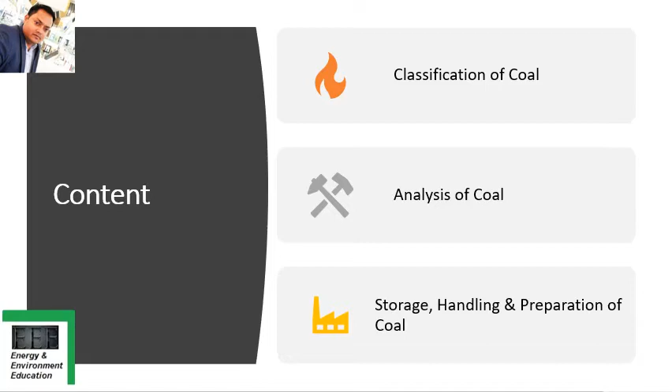So first comes the coal classification. You can see here the coal is classified into three major types. These three names you must remember because they may ask you in short type questions, or maybe objective type questions also: anthracite, bituminous, and lignite are the three major types on which coal is classified. However, there is no clear demarcation between them. And coal is further classified as semi-anthracite, semi-bituminous, and subbituminous.

Anthracite is the oldest coal from the geological perspective. So they may also ask you to state which is the oldest coal. In that case, anthracite will be the correct answer. It is a hard coal. So if they ask you about anthracite, briefly you can explain that it is the oldest coal, and you can also explain the composition given here.

Lignite is the youngest coal from the geological perspective. So as far as the oldest is concerned, anthracite is the oldest one, and the youngest one is lignite. These two names you must remember in this way also. And it's a soft coal; that one was a hard coal. They can ask you the difference briefly, to explain it, and also as a one-word answer type question, friends.

Fixed carbon refers to carbon in free state, not combined with other elements. So they may ask you what you mean by fixed carbon. This type of question has come earlier and can come in the exam also. Volatile matter refers to those combustible constituents of coal that vaporize when coal is heated. So they may ask you to define volatile matter also. These types of questions can come from different parts of the paragraph you are seeing in the slide. So this is very important as far as the exam is concerned, friends.

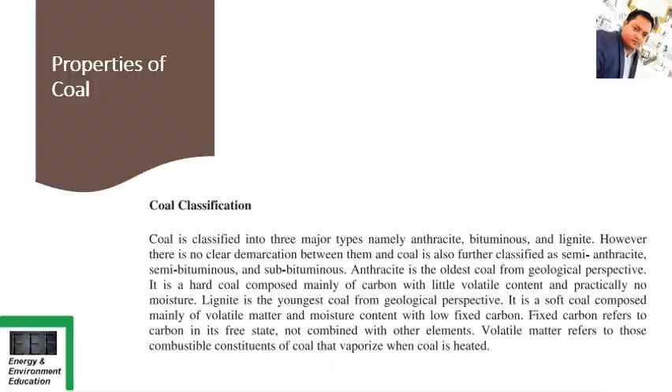As far as the gradation of coal is concerned, there are different grades given, grade A, B, C, D, E, F, G, and you can see the calorific value accordingly. For example, grade A is exceeding 6,200 kilocalorie per kg calorific value, and as you go down, the calorific value decreases.

So A is a better coal, and likewise G is the poorest type of coal you can consider. So you can grade the coal accordingly on the basis of calorific value. They can ask you to classify the coal, and also they may ask you to explain the gradation of coal.

So when they ask you to classify the coal as a whole, you can give that paragraph that I mentioned in the last slide, friends. And when you are asked to grade the coal, you can list out the different types of coals, grading, and the calorific value accordingly, friends. GCV for various coals is also given here.

For lignite, the GCV value is 4,500, Indian coal is 4,000, Indonesian coal is 5,500, South African coal; country-wise you can see the different types of coals here, and they have their own calorific value. So this is also very important.

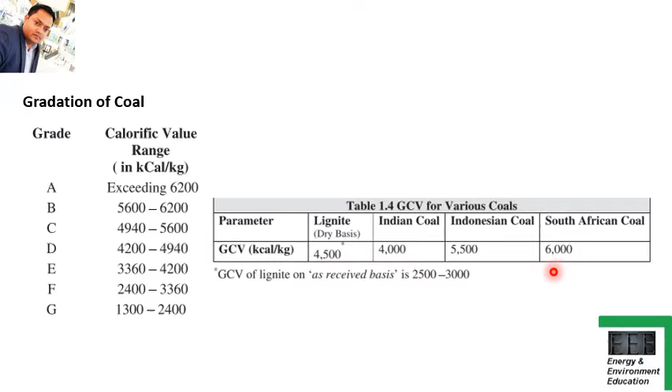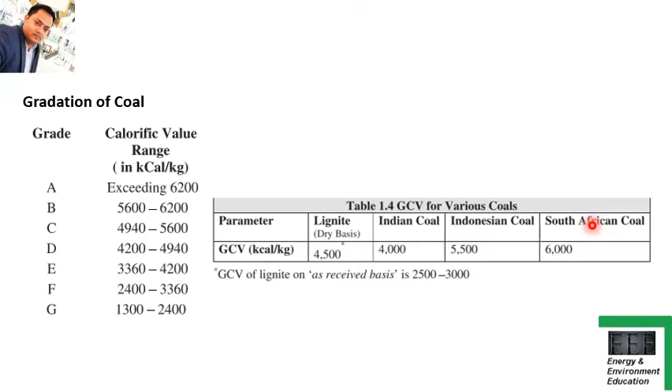And for the exam they can ask you which is the best type of coal, and also on GCV value they may ask you questions, and which country has the best type of coal as far as the GCV value is concerned. They may ask you the same question in different ways, friends. So this is very important for you to understand.

And this is also an important part of the chapter where they may ask you to give the analysis of coal. So basically there are two methods, the ultimate analysis and the proximate analysis. They may ask you to explain the two methods, or to differentiate between the two methods. So you must understand these two methods and also their differences.

Ultimate analysis determines all coal components, elements, solid or gaseous, and the proximate analysis determines only the fixed carbon, volatile matter, moisture, and ash as percentages. So this is the basic difference between the ultimate analysis and the proximate analysis, which you should remember and understand also.

Ultimate analysis is determined in a properly equipped laboratory by a skilled chemist, while proximate analysis can be determined with a simple apparatus. This is the second difference. So both the differences you must remember, friends, and understand also. It may be noted that proximate has no connection with the word approximate. This is another term that you must understand and remember, friends.

So here two differences are given between the two methods, the ultimate analysis and the proximate analysis. They may ask you in the exam to differentiate between the two methods. So in that case, you can explain in this way, friends.

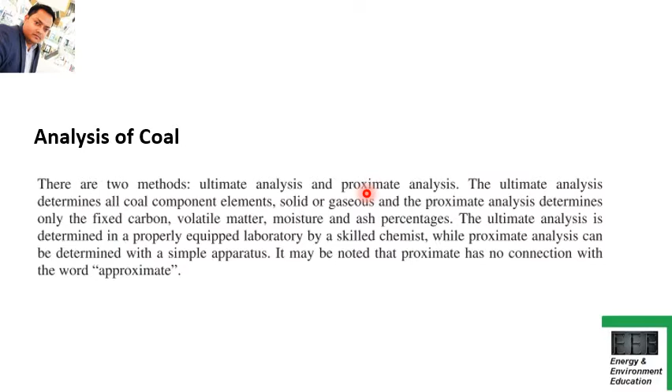Now coming to the proximate analysis, friends, this is very important to understand. Proximate analysis indicates the percentage by weight of the fixed carbon, volatiles, ash, and moisture. These are the four components when you go for the proximate analysis: the moisture, ash, volatile matter, and the fixed carbon.

Now see here, the amount of fixed carbon and volatile combustible matter directly contribute to the heating value of the coal. So when you determine the heating value of a coal, two components are very important: the fixed carbon and the volatile matter. Fixed carbon acts as the main heat generator. So the more fixed carbon you have, the more heat will be generated, and the better it is.

And high volatile matter content indicates easy ignition of fuel. So if it is highly volatile, it will be burned easily. These are two major components you must understand when you categorize the coal. Then the ash content is important in the design of the furnace. The more ash there is in the coal, it's not viable enough. So you need to understand how much ash content is there in the coal.

So ash content is also equally important to design the furnace grate, combustion volume, and pollution control equipment. The more the ash, the more pollution there will be. So the ash handling system also needs to be upgraded. That's why I'm saying fixed carbon and volatile combustible matter are important for the burning of the coal, but for the handling of the coal, pollution and other aspects, you have to understand that ash is also important.

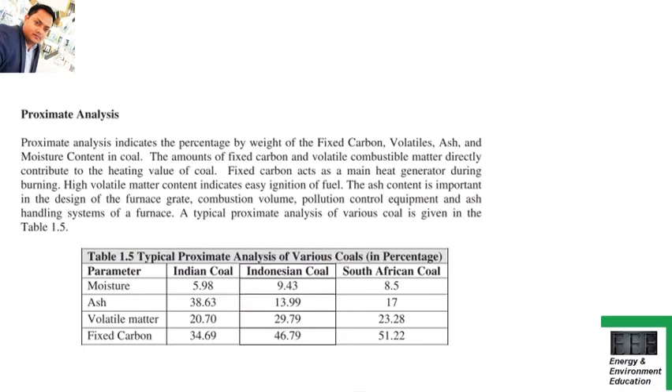Now, the ultimate analysis indicates the various elemental chemical constituents. So, unlike the proximate analysis, here the other chemical constituents are also considered, like carbon, hydrogen, oxygen, sulfur, etc. These things are considered when you go for the detailed analysis, that is the ultimate analysis. So in this case the different components are listed out here: moisture, mineral matter, carbon, hydrogen, nitrogen, sulfur, oxygen. Accordingly, you can see the Indian coal and the Indonesian coal comparison is given as a percentage.

So this is also important for you to understand, when they ask you to differentiate between the two. These can be useful terms that can be highlighted during the exam, friends, when you write the differences. And also they may ask you to give examples of the different components in the case of ultimate analysis, and the components which we have in the case of proximate analysis. That also should be remembered, friends. So this is very important.

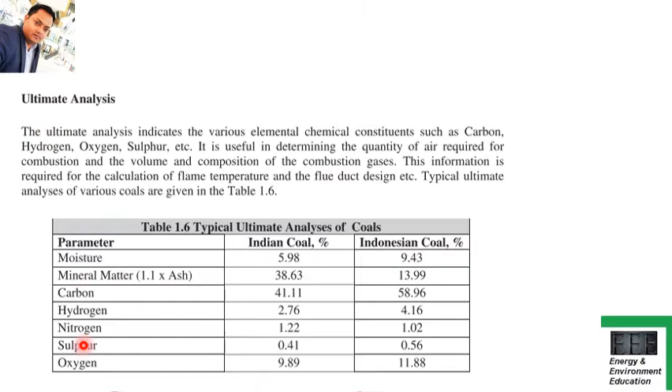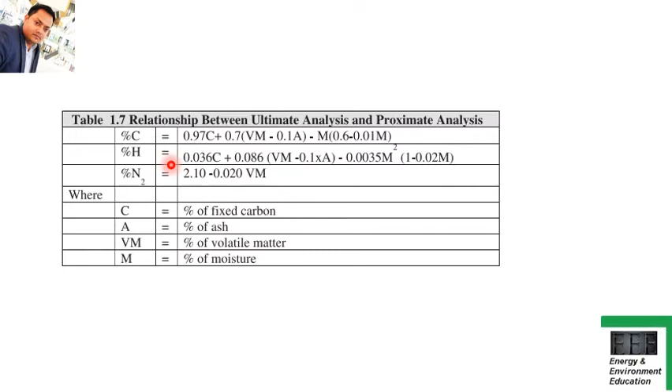Now, handling of coal is very important. That is, storage and preparation of coal is very important. The main goal of good coal storage is to minimize the carpet loss and also the loss due to spontaneous combustion. So this thing is very important about how you store the coal, because there should not be any carpet loss ongoing, and also there should not be any combustion, because if it gets ignited, this will be really hazardous for everybody in the plant. So that's why the handling of the coal or the storage of coal is very much important.

Formation of soft carpet comprising coal dust and soil causes carpet loss. So these things have to be remembered. I'm not going to explain in detail here. So basically what I'm trying to explain to you here is that the storage of coal is very much important, and the methodology that is adopted to store the coal has to be understood by you, and also remembered by you, and why it is hazardous and how it can be better managed. These things have to be understood by you, friends.

The measures that would help in reducing the carpet loss. Now these are the 2 points where they highlighted the different measures you can take to reduce the carpet losses. So preparation of the hard ground for coal to be stacked upon. So it's not to be soft ground. Also preparation of a standard storage bays out of concrete and brick. These two things are very much important when you are going for the storage of coal. So when they ask you to write some notes or briefly explain the storage of coal, you can highlight these 2 points, and briefly explain them, and the methodology to store the coal, friends.

Now coming to the preparation of coal. Preparation of coal prior to feeding into the boiler is an important step for achieving good combustion. Large and irregular lumps of coal may cause the following problems. So basically you need to understand that how you prepare the coal is very much essential before you feed it inside the boiler, friends. Poor combustion conditions and inadequate furnace temperature result from irregular lumps of coal. Higher excess air resulting in higher stack loss, increase of unburned in the ash, and low thermal efficiency. So you need to understand how to prepare the coal in a better way, such that these things are not problematic for you.

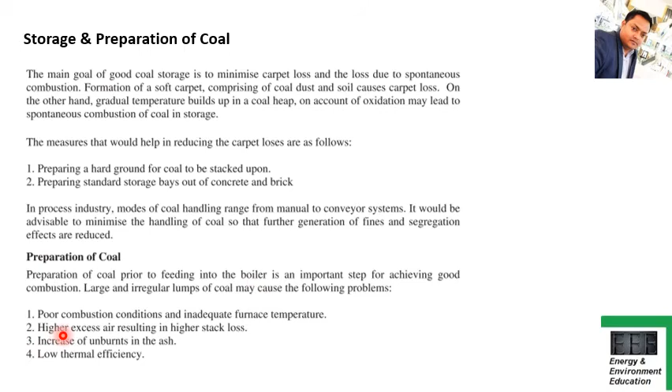So as per the last slide, we saw the preparation of coal is very important. Large and irregular lumps of coal can cause a lot of problems. Therefore, proper sizing of coal is very much important. Proper coal sizing is one of the key measures to ensure efficient combustion. Proper coal sizing with specific relevance to the type of firing system helps toward even burning. So if the coal size is proper and even, then there will be even burning, reduced ash losses and better combustion efficiency.

But if you have irregular size and larger lumps of coal, it will not burn efficiently and you will have some problems. So coal is reduced in size by crushing and pulverizing. For that reason you need to crush the coal and pulverize the coal such that you have an equal coal size when you feed it into the boiler. So these things are very important for you to understand.

This helps to reduce the power consumption also in the crusher. So these things are very much important because before you go for crushing and pulverizing, you should have the pre-crushed coal; it can be economical for smaller units. So you can also have the pre-crushed coal in use before you go for the crushing and pulverizing system, friends. So these things are important for you to understand, and you can highlight them when you write short notes about the sizing of coal, friends.

So they may ask you one full question on coal preparation, sizing of coal, and handling of coal, all these things, friends. So it's very important for you to understand as far as design is concerned. Proper size of coal for various types of firing system is given here. This table I'm not going to explain here. You can just go through and remember this table when you write it in the exam, friends.

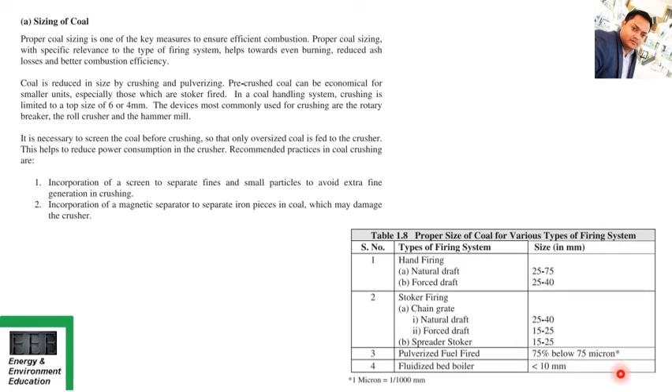Now another important point is the conditioning of coal, where the fines in the coal present problems in combustion on account of segregation effects. So segregation of fines from large coal pieces can be reduced to a great extent by conditioning coal with water. So this is the important aspect which you must understand, why the conditioning of coal is important, where you can segregate all the fines present with the coal, friends, when you are firing inside the boiler. So this thing is also important.

Water helps fine particles to stick to the bigger lumps due to the surface tension of the moisture. This is the process, the activity. I'm not going to explain it again here. Just read it; it's very easy to understand. This entire activity is explained here briefly, and the way the coal can be conditioned such that any extra or foreign particles or any fines which are not acceptable, not required, may be removed or segregated. This is a way it can be done. Everything here is easily understood once you read it.

Now the next part is the blending of coal. In the case of coal lots having excessive fines, it's advisable to blend the predominantly lumped coal with lots containing excessive fines. So coal blending is also very important, because coal blending may thus help to limit the extent of fines in coal being fired to not more than 25%. So you should also understand this particular term. Again, I'm not going to explain what coal blending is all about. You can just go to the book and easily understand it. So basically, the three parts, coal conditioning, coal preparation and blending of coal, are very much important for you to understand. And they may ask you to briefly explain them in the exam, friends.

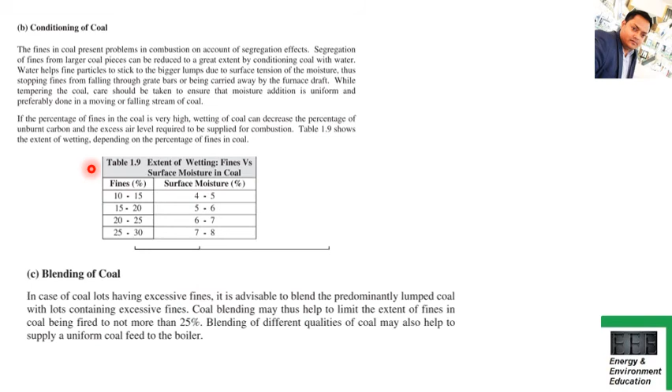So with this, I am ending part B of this chapter, friends. I'll come up with part C in a few days. I'll upload a video on part C also. I hope you have gone through part A. If not yet, please go to part A first, come back to part B and wait for part C. So all these important sections I am trying to explain in different videos that may help you to prepare for your exams, friends. So I hope you enjoyed this video, and the relevant important points highlighted by me can be really useful for you in the exam, friends.